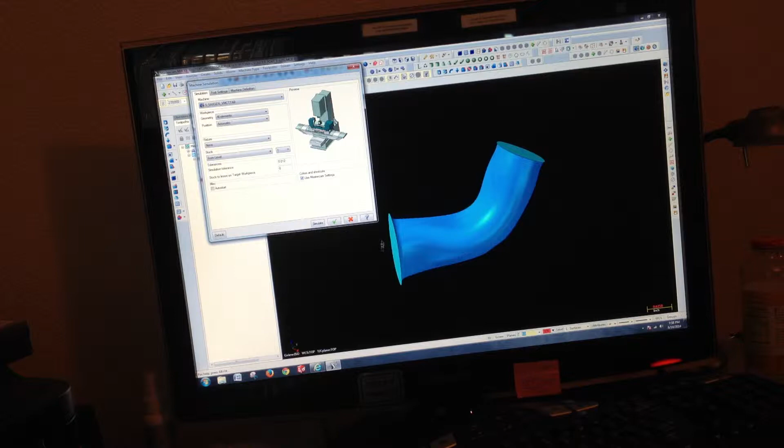So I'm gonna bring this back here. Everything's done, you hit simulate. There's a table like a TR210. Simulate. Mastercam's gonna do some crunching a little bit.

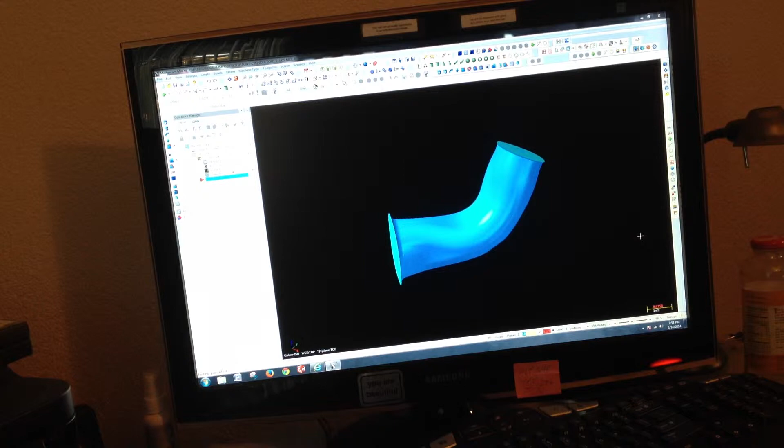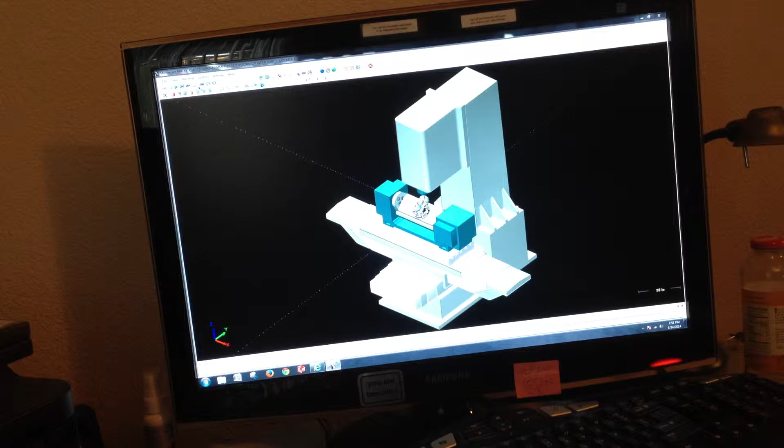What it's going to do is rough from the top first. So we're going to go all the way upper left, right there. You see a little icon, you click on that to fit the screen. Next to it, red box, isometric. We set up our speed right down the middle, and everything else set, and all you do is hit run.

So what you can do is click on the part, then use your mouse and your wheel to zoom in and zoom out. In order to do that, you target the area you want, then use your mouse.

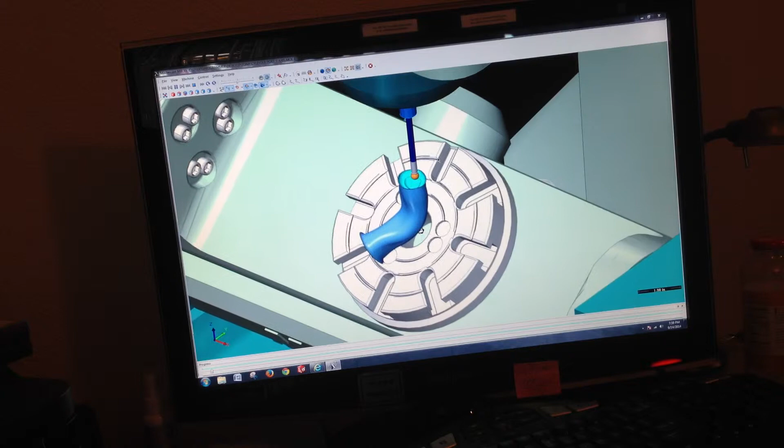As you can see right now, the lollipop starts roughing out the upper portion, and while it's doing that, bring it down a little bit.

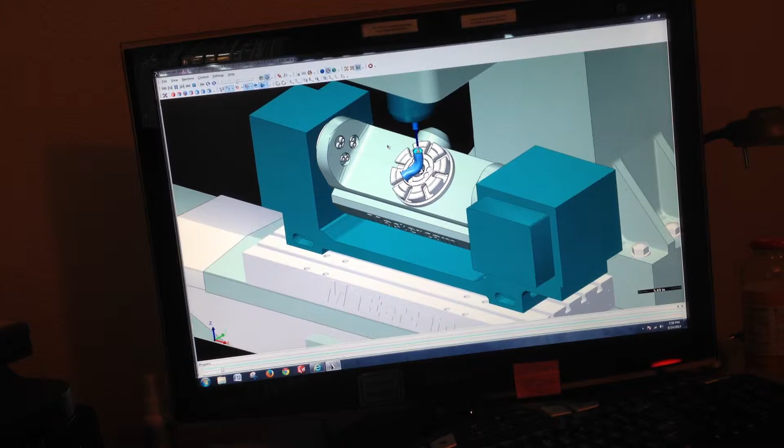So while it's doing that right now, it's basically on the upper section of this part, and this portion is almost straight down because Mastercam aligns it almost vertically up for the lollipop to get the straight portion out. While it's doing that straight part, you'll see more A-axis table rotation than B-axis because there's hardly any movement, just little tiny movements on the B-axis right now.

But once it gets lower towards the middle, that kink plus that bump in the bottom, you're gonna see a lot of B-axis movement. Once it's done with the first portion of the cylinder port, it's going to pull the tool out, rotate the A and B axis, and go rough at the other end. So this video is going to take very long, I'm going to have to speed it up.

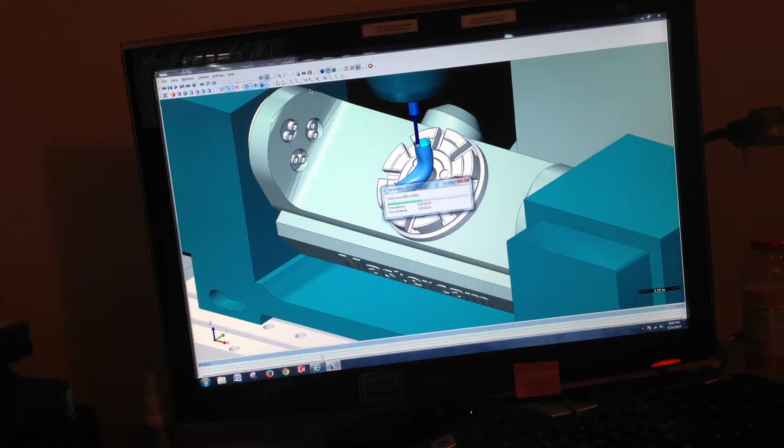Mastercam's going to crunch a little bit. Once you see it's done crunching here, you go all the way to the upper left corner and hit play again. So now Mastercam will take it all the way to where you dragged it to, and as you can see, the B-axis started becoming a lot more active.

You can see more motion because it's getting close to the kink, and the B-axis is a lot more in action right now, trying to adjust the lollipop so we don't violate anything, any surfaces. I'm going to move it again towards the end of the first portion, right about here probably, maybe a little farther than that, but...

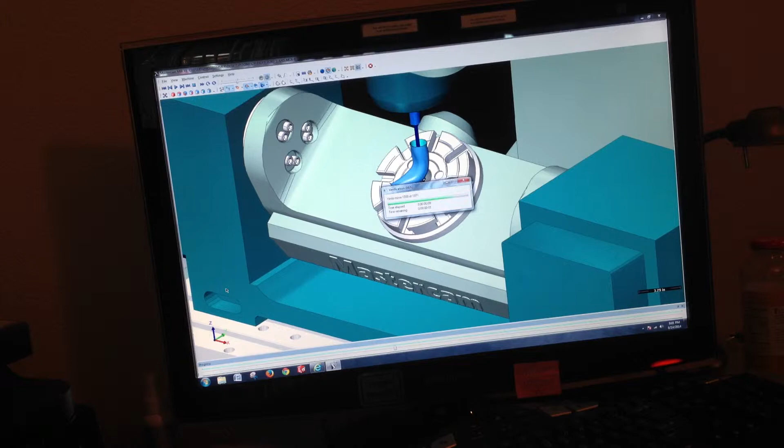Mastercam plays games once in a while, you just have to be patient. Mastercam had bugs ever since I started programming 20 years ago, and they still have bugs. Sometimes it gets on your nerves, but you just have to stay calm, collected, and cool, and do what you have to do to get the job done.

So right now it's a lot more active, telling me it's almost at the bottom. Once it gets to the bottom, it's gonna overlap a little bit, then the lollipop's gonna pull out, A and B gonna rotate, then it's gonna go through the bottom portion, off the cylinder port from the other end.

Once it rotates to the other end, I'm gonna speed it up to get this thing done as fast as possible. Now you can see what 5-axis is like, with the A and B axis.

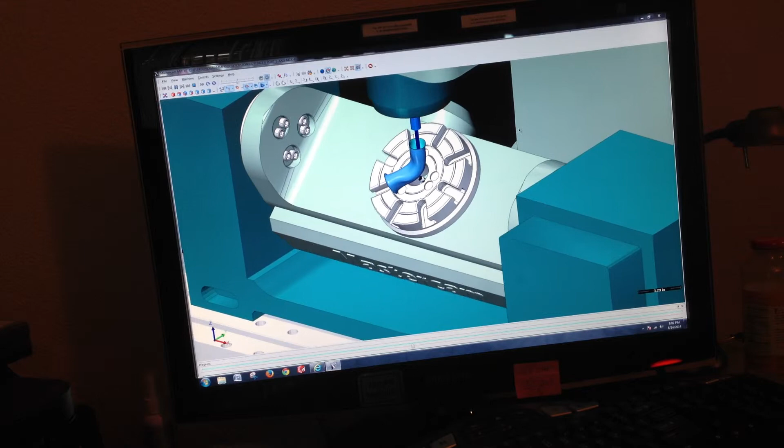Right now I can see it's going through the bottom, through the hump in the bottom, and it's gonna pull out any second. The more the B rotation you see, it's getting closer to the bottom based on my experience, just trying to adjust the tool to all those features in the bottom. And now it should pull out.

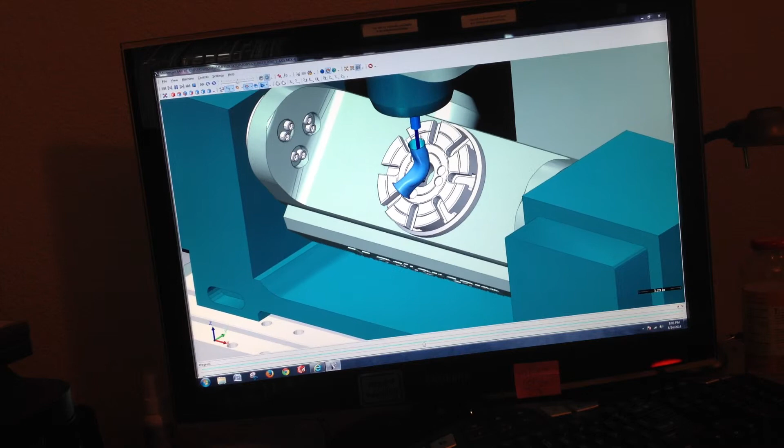So now it's getting B rotations. It's already done, it's at the hump in the bottom. And remember, we created a 20 thou shield around the lollipop and also the tool holder, so that it doesn't violate anything. Otherwise the machine will alarm out and stop.

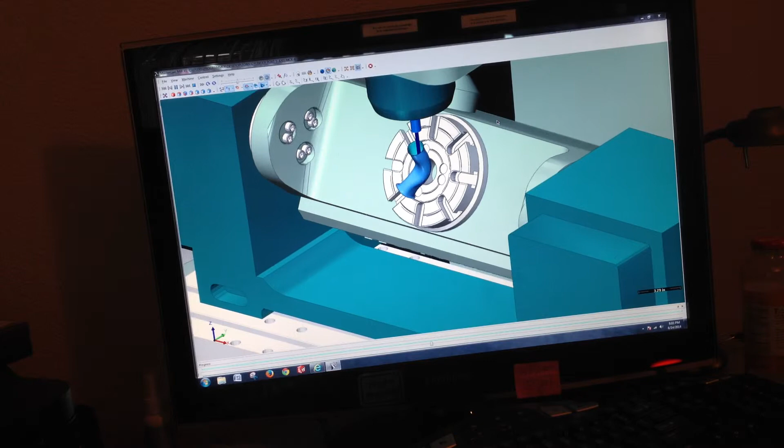Okay, now come on, pull it out, it's getting too long. One, two, three. No? Oh, okay.

So now you see A and B are adjusting themselves. A is coming and B is rotating, and it's gonna set itself up almost perpendicular to the spindle. It's gonna do the same thing here.

It's gonna rough everything out, and it becomes a lot more active on the B axis when you get close to the bottom. So I'm gonna just drag it out all the way to the end, right about here. It's gonna start crunching.

The idea is to create a stock, because if you load that same tube in here, then you cannot machine anything off of it. So by creating surfaces at the end of both ends, first you create a curve on one edge, then chain it for a flat boundary. Once you do that, you can transfer all of that to another level, both flat boundaries and the main body, and then use that for a stock, call it stock reference.

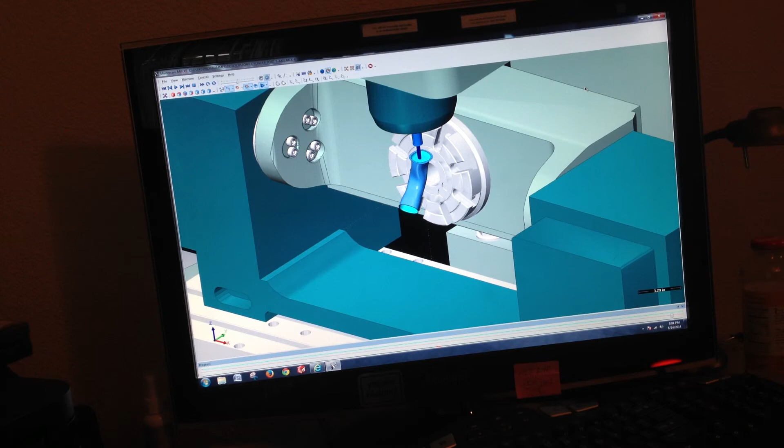And when Mastercam asks you to select your surfaces, just open it up. Everything's color coded already, just go to QM, Quick Mask Colors, choose that blue color, and Mastercam picks up all those surfaces and starts machining.

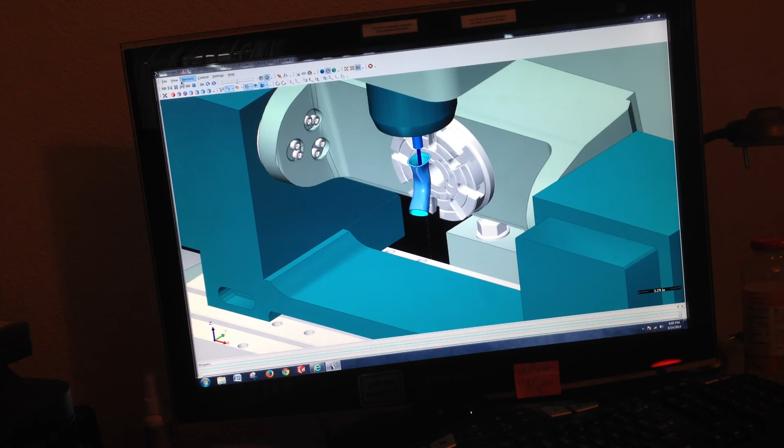So now I'm going back to the upper left corner, hit start, and it's going to finish the end right now. You can see it's a lot more active now, the B axis almost getting very close. If you have a problem with that, all you have to do is space it out, as I was showing you earlier. So this is it.